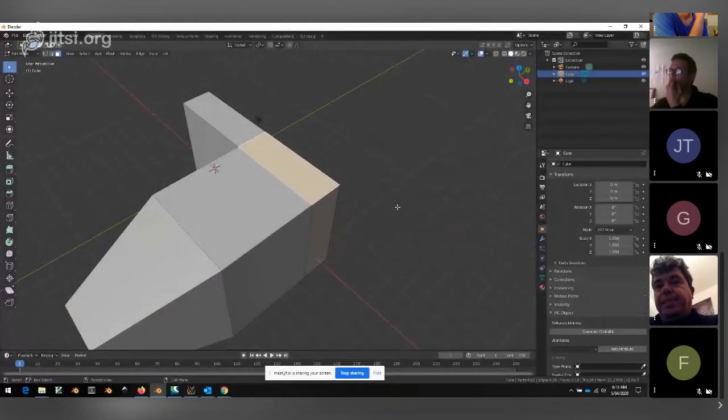As you can see, it's a kind of fluid modeling system, if you've never used this type of 3D modeling before. Most people in the construction industry are used to constructive modeling, where you model solids and Boolean them together. And from what I hear, the modeling tools used by engineering packages are even more limited than that. So Revit, for example, comes with essentially five modeling tools: extrude, loft, revolve, and something like that. Whereas this one is the type of thing you would use in Hollywood or CG, so it comes with a significant amount of modeling tools and a significant amount of various shapes.

So here, which I'm just opening up, is the default Blender monkey, the mascot of Blender. You can see I'm not really clicking any buttons, it's all hotkey driven. That's one of the things Blender is very good at, it's a very, very fast modeling tool.

Now, historically, Blender had no BIM functions at all. This is a relatively new development, probably only started late last year. We were doing a project, and we were just mocking up geometry in 3D space, trying to resolve various construction junctions. We were modeling it pretty rapidly in Blender, and it was quite a detailed junction. We were doing some curtain panels, and we found that we were able to prototype the construction details really quickly.

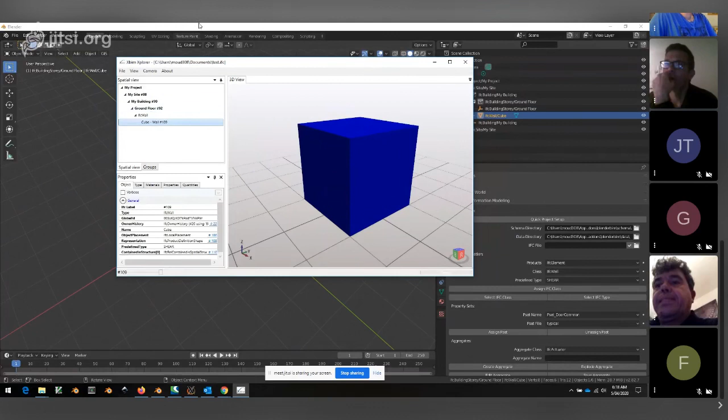And that's an example of the BIM functions available in Blender. As you can see, the geometry is decoupled from the classification, and this is quite important because many modeling programs don't currently let you do that. So the implications of that is that I can model quite freely, and I'll just turn on some snaps here so that I can model quite a bit faster.

So this is a 200 mil thick slab, and we'll just arbitrarily give it some dimensions. Some have seen this demo before, but I'll just do it again. So here I'm snapping a plane to that direction. I'm snapping that. I'm saying that's 90 mil in this direction, and that's 45 mil in that direction, and let's say it goes up an arbitrary amount, it doesn't matter.

There are various array tools I can use. So for example, if this were a stud, I can array this exactly along a particular axis, let's say the y-axis, every 450, which is pretty typical for a series of studs, the spacing.

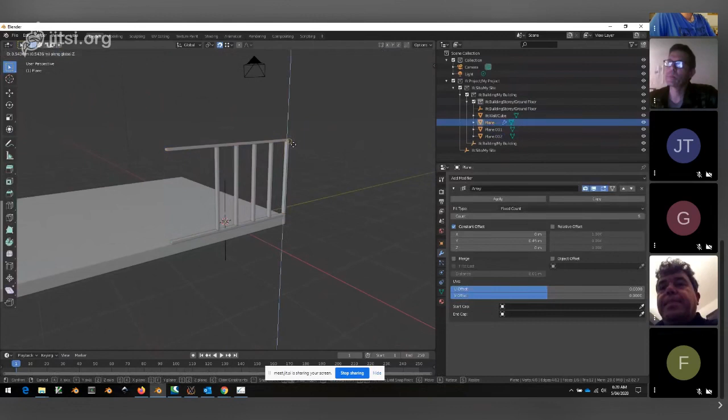I can then go and grab this guy and rotate him, rotate him here and snap him there. And let's create a bottom plate, and we'll take that bottom plate, set him as a separate object, clear that array. And now we have a bottom plate. That bottom plate is intersecting, so we'll just move that up a little bit, move that up here, maybe snap that to the top. And you can see we're getting a piece of a wall here.

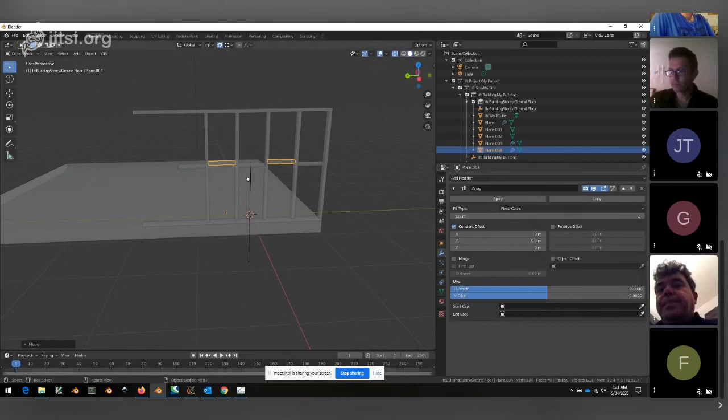Now we'll want to put some noggins in there. So I can snap this here, maybe just arbitrarily move that down here and move that back like that. As you can see, noggins are usually staggered so that you can get the nails in. So we can do that to the noggins and move the second bunch over here and move that so that it's staggered. And so you can see it's quite rapid to be modeling things in Blender.

There's not much - I don't need to go and jump in and out of views and draw profiles and that style of modeling. And I don't actually need to think about what I'm modeling while I'm modeling it. I just draw. And this is quite natural if you come from an architectural background. Maybe a little bit less natural if you come from a services background.

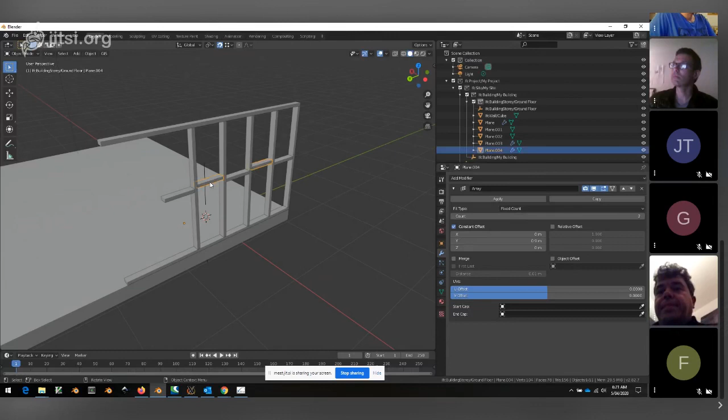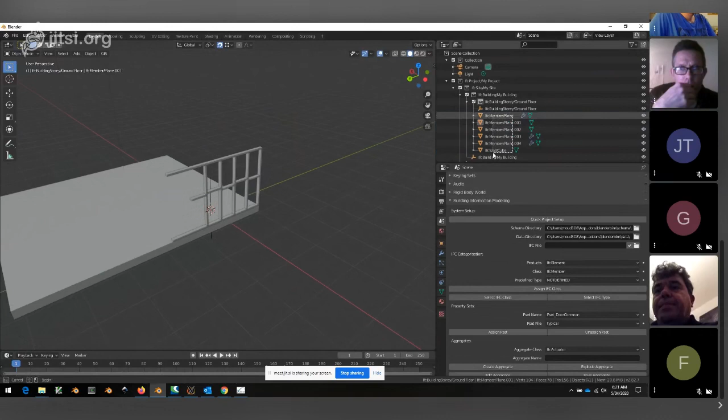And later on, once I've finished working a few things out, I can just go and select a whole bunch of things and say, you are all member elements. And if I find member somewhere here, I won't define it now, and assign, and now everything is classified. So I can select all these objects, hit export, export my IFC file, and there we go, we have our building.

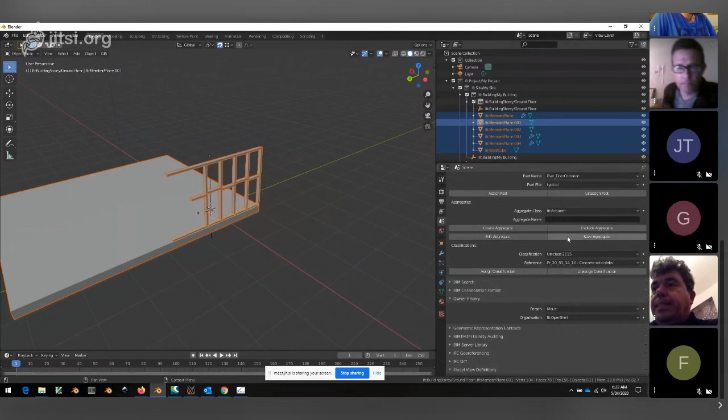Now there's a whole bunch of other features here. I might go through a few of them today. There are property sets you can assign to things, and it understands aggregates and classifications. So maybe what I'll do is I'll open up a file and we can see that.

So if I start a blank file here, what I'm going to do is turn on this experimental CPU multiprocessing feature. That allows me to import files using all of my processors, so it's a bit faster. I've got a bunch of IFC test files here. I'll start with this sample project.

It's 61 megabytes, so I'm going to start the stopwatch here, because this has been one of the biggest issues I found with IFC imports and exports - that they're really slow. So I've just started the stopwatch, and it's chugging away.

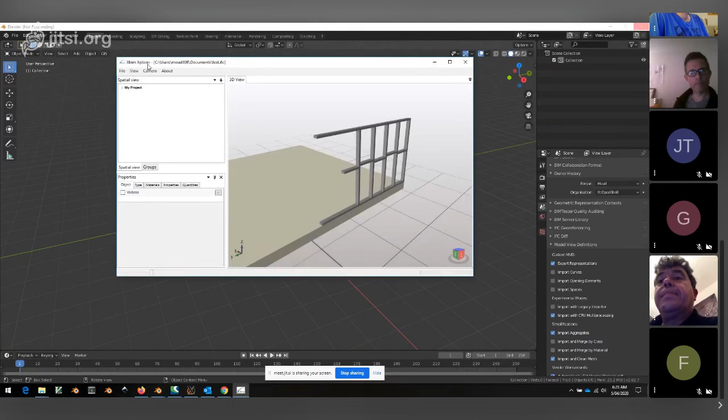Usually when you get to IFC files nearing 100 meg and then exceeding 100 meg, it just becomes a bit of a pain to use them in packages which can author. It's okay to view them in tools like XBIM, because all they do is just view the file. But in an authoring package, it needs to convert the file into something you can edit as well.

So while that's loading, for those who haven't seen, this is the BlenderBIM site. There are new features added nearly every single day. So if I click on View All Changes, you can see the work that's been happening.

So just for example, two days ago, support for different aspect ratios for BCF. I'll give you a little demo of BCF later on today. We also allow the ability to diff IFC files together.

BlenderBIM is part of the IFC Open Shell package, and this comes with a whole series of little utilities which you can find in this code repository. I can send the link out if you're interested.

And the utilities, even though BlenderBIM is built with Blender, many of the utilities are built as separate programs. That way you can plug them into each other. So it can also be plugged into FreeCAD, for example. You can plug it into BIM server, or if you're rolling your own, you can also plug it into that.

So there are tools, for example, to convert IFC data into a COBie spreadsheet, to convert IFC into OBJ and DAE file formats, to extract IFC data out into a CSV - we'll just see if it's still importing - and to look for differences between IFC files. So if you've used Git before, you know it can check the difference between two files. Here you can do that as well, and I'll show you a quick demo of that.

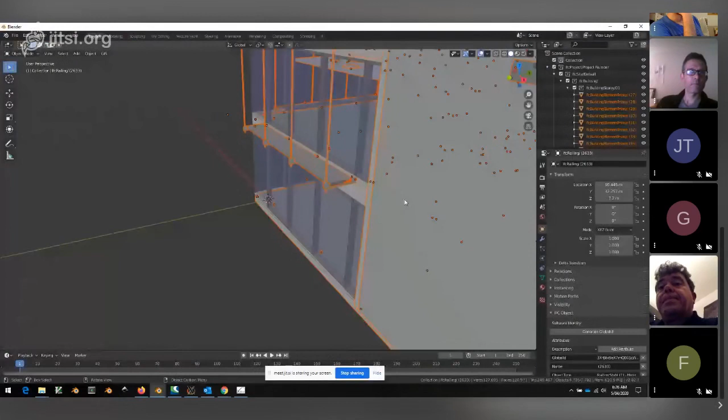This is something that's quite important, because we often have to work with quite large IFC files - we're talking gigabytes of IFC data. So getting the import times down is very, very important. So far, I think 3 minutes for this level of detail of a model is not too bad.

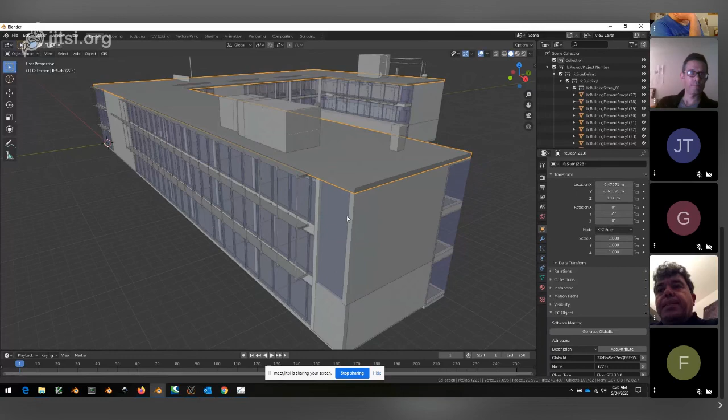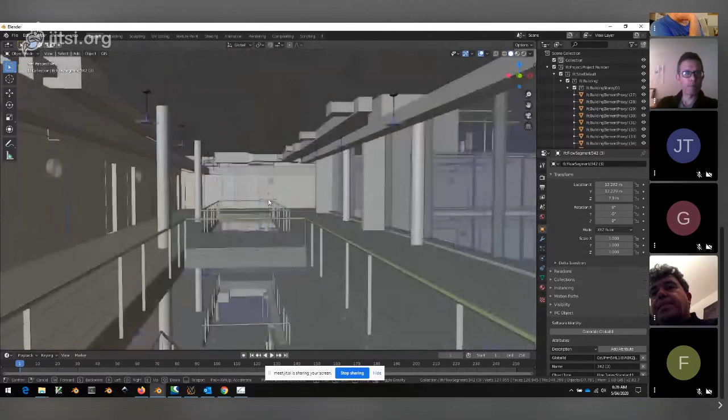And you can see there's no lag whatsoever. Probably on the video streaming there's a bit of lag, but on my screen everything's really fast. You can see this is a multidisciplinary model - there's a mech in here, there's a bit of, I'm not sure what that is, probably fire, and so on. You can see it's relatively detailed, and there's no lag as I just go around the screen.

How do you fly with a camera like this? Let's say one of the problems I had was to navigate in the model.

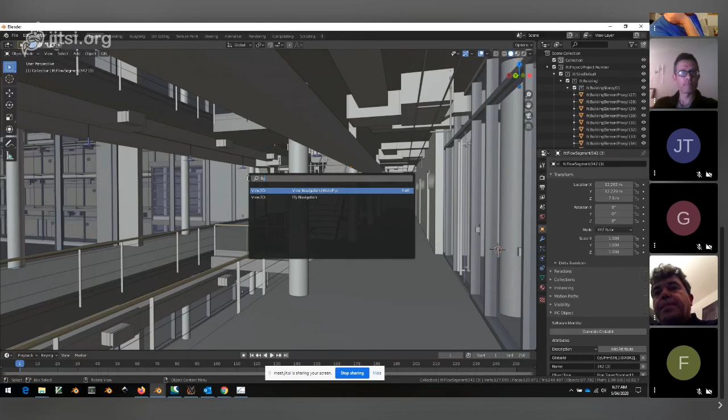Yeah, so that's something called fly mode in Blender. If you press F3, that will bring up everything that's possible in Blender. So if you type in fly, you can see there's a view navigation, walk fly, and the shortcut is shift backtick, which is just something you have to memorize.

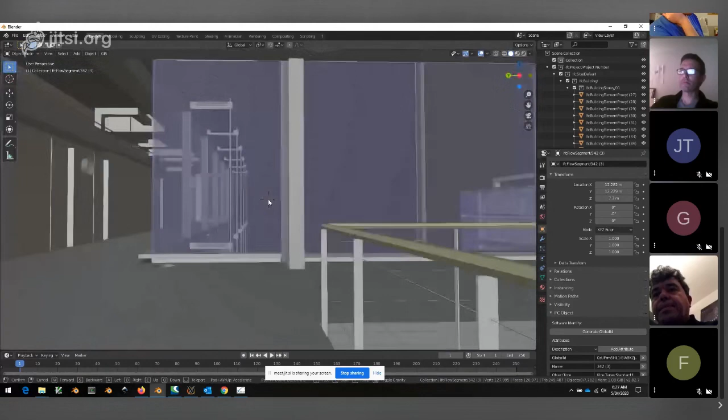So if I press it, it basically turns it into a first-person shooter game, and I can move around and fly and so on, and go up and down. It's really, really smooth, especially when investigating things. And I can hold shift to go faster, and I can use the scroll wheel as well to change my speed.

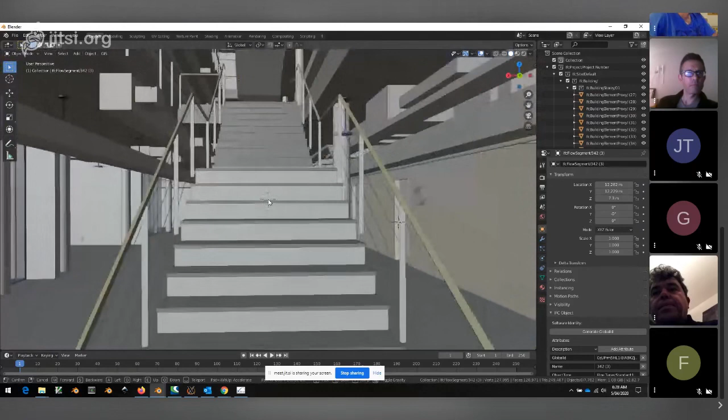So I can go really slow if I want to work on this particular junction. It also allows walk mode. Here I turned on gravity, and I can jump through this void and fall down to the bottom floor and walk upstairs and so on. Wow, it's a really great way to navigate your model and spot ridiculous things like this balustrade junction.

Just a side note, if you don't have an American keyboard, you can change keys in options. So that is here, key map. And I think if you just search fly, you can click here and change it to whatever you need it to be.

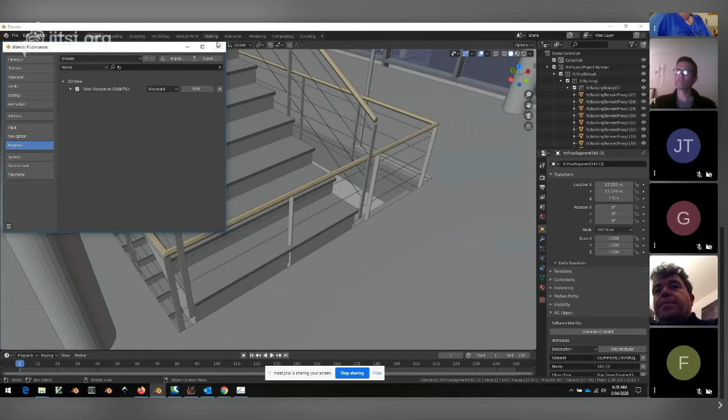Where was I? Yeah, so if I turn on a few more shadows, we'll add a bit of cavity as well. This just makes things nicer. You can see a bit of shading happening in the model, and you can see there's still no lag, but I will turn it off just for the demo.

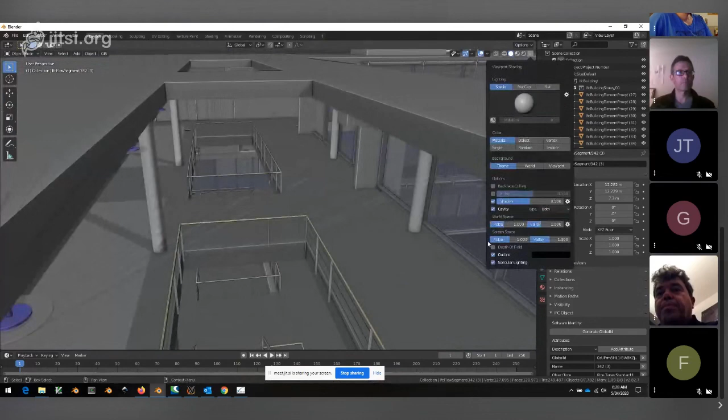One of the things you can do is select by a certain type of class in IFC. So for example, if I wanted to select all slab objects, I can just hit select, and now I have them all selected, and I can go and hide them and so on and see all the guts of the model.

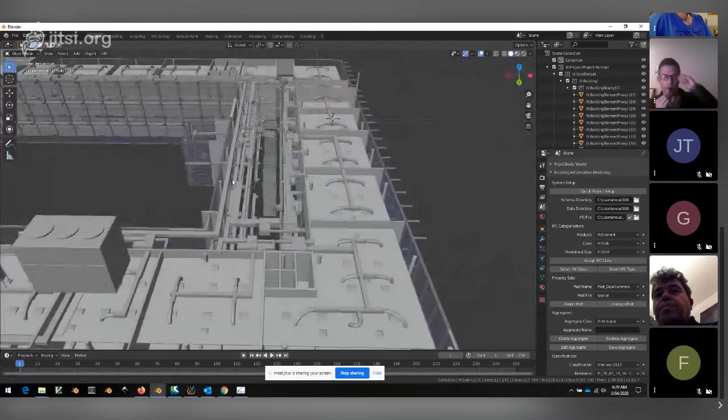There's also various types of search features. So if I click on an object in the object properties, you can see it's brought all of the object attributes, the name, object type. This one comes from Revit, so you can see the tag is the Revit element ID and a whole bunch of property sets. It has pset slab common, dimensions, constraints, a whole bunch of property sets. It's also got some quantities, a gross area and a perimeter associated with it.

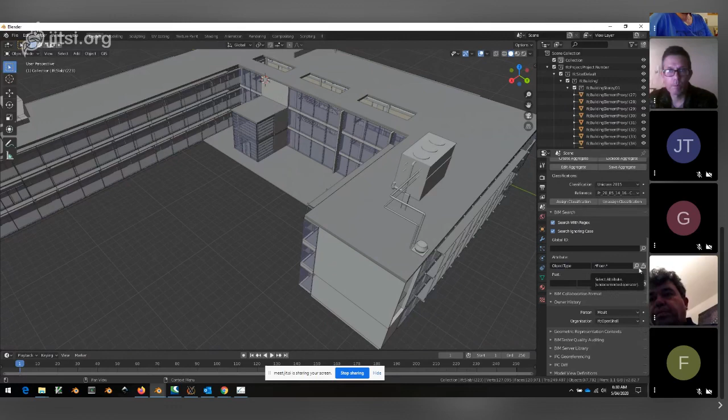So what I can do is search on these things. Let's say I want to search for all object types that contain the word floor. I can do that as well. There's a search feature with a lot of options here, but I'll just go through a few. I can search for a particular attribute of object type, and this time I want to use wildcards. The BIM search supports regex, so you can do some very powerful searching, and you can see it's come up with all these results.

What I can additionally do is color the model. I've just pressed that button, and if I change it into object color mode, you can see it has now colored the model based on its object type attribute. If it has a different color, it has a different object type. This is very useful when auditing a model. You can do things like coloring based off a fire rating property, and immediately spot things which are not fire rated that should be, or whatever.

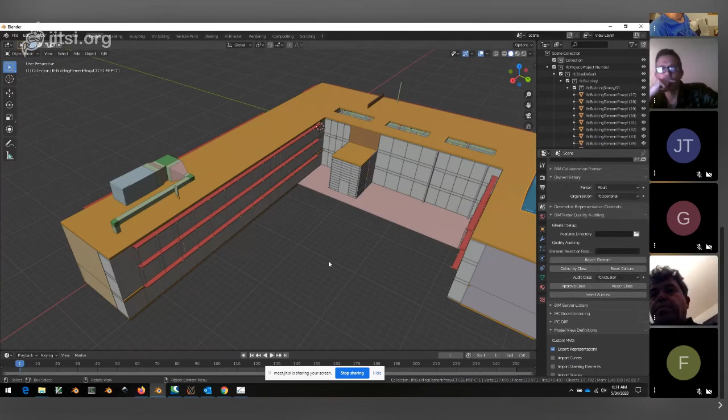Another really useful tool is to color things based off their IFC class. If I select everything in the model and hit color by class, you can see the colors have changed again. I noticed this wall is different from this wall, and that's because this one is a regular IFC wall, and this is the IFC wall standard case.

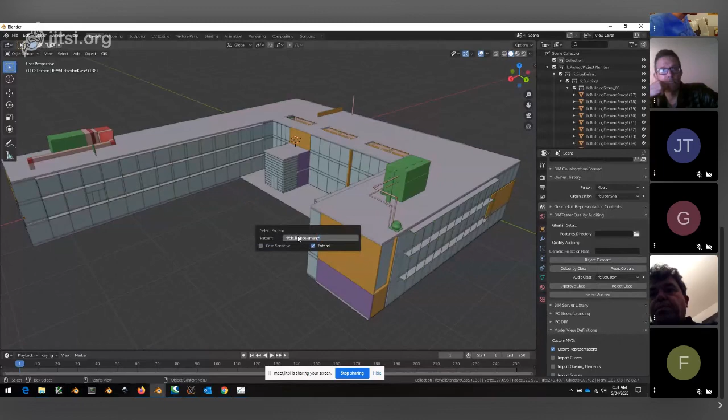I can also use pattern select tools, so I can search for building element proxy. As you can see, everything I've selected right now, if I isolate, everything in green is a building element proxy object, which means the BIM author has not properly classified this object. For example, I think these are probably structural members for the facade. They probably should be marked as an IFC member, for example, or especially these very important big boxes, this AHU and what's this? I'm not entirely sure what this particular object is.

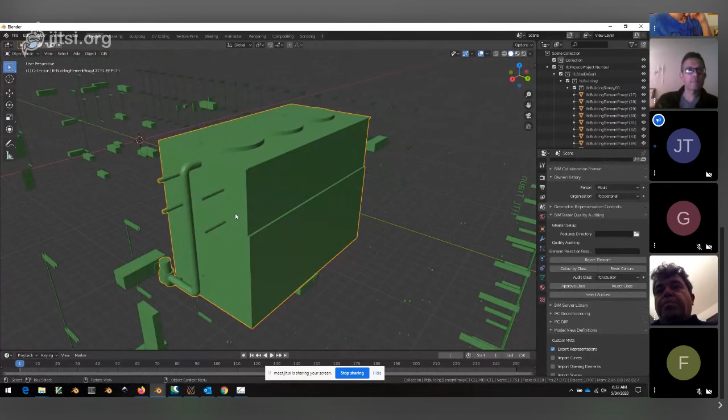But it's for cooling, yeah, some sort of cooling thing. It's probably pretty important to be maintained, for example. And because they haven't properly classified this object, that means if this model wants to be used for facility management purposes, well, it won't show up because they haven't properly put it into the right category. And so that's a problem.

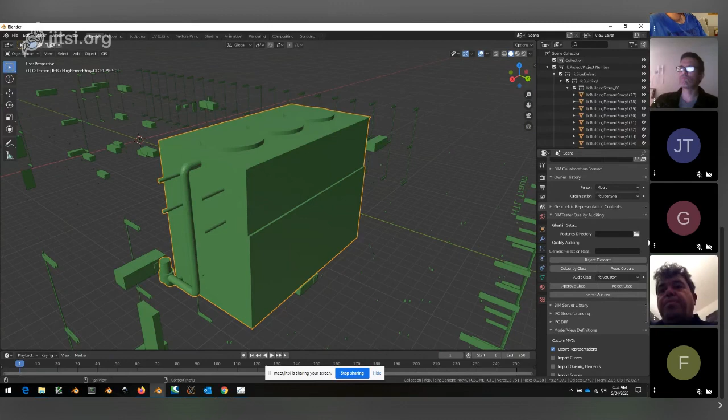If I just do a selection here, I'm just curious, so there's 700 unclassified objects, and that's 10% of the 7,000 that I see here. That's pretty poor, but that's also the kind of state of the industry today, and that's a bit unfortunate. You can also see all the names of the objects are a bit nonsensical, just numbers, with the exception of a few, probably coming from the MEP trades. They tend to do a better job, I find, in naming things, and the doors.

Actually, now that I take a closer look, maybe the names do make a bit more sense. Maybe they've chosen to name only certain things and keep the rest as numbers.

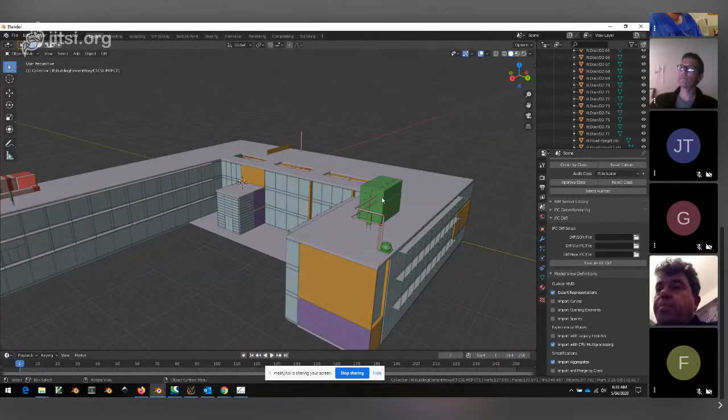Anyway, so that gives you an idea of some of the things possible. The color palette is something predefined, let's say. Yeah, currently it's hard-coded. The issue is when you get too many colors, it just becomes hard to see. So what I've done is have it cycle through a preset list of maybe 7 or 8 colors.

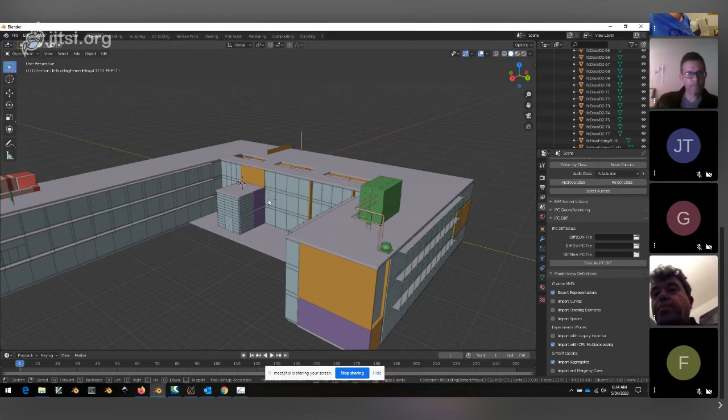Sometimes that's a problem because you have attributes with more than 8 types. But just from using it day in, day out, it seems to do the job. Good, simply because I can tell if something is a color I don't expect. For example, I expect all ducts to be light green, light pink, and all junctions and flow fitting elements to be this red color. And I can instantly spot if something isn't, or if something is green, and that's the most important thing if I'm checking for classifications.

So hope that made a bit of sense. Yes, no, it looks good. The colors look good to me, at least. Oops, fantastic bathroom. Okay.

I might also go through a couple of other features. BCF is a recent addition. BCF is another standard by Building Smart. They give the ability to mark issues in a model. So in software engineering, we all deal with issue trackers and bug trackers, but it's not really standardized. You can't really move from one bug tracker to another. That's usually not a problem in software because it's just a bug. But in AEC it's probably more important because it has legal implications, so being able to keep track of all the issues within a BIM model is pretty important.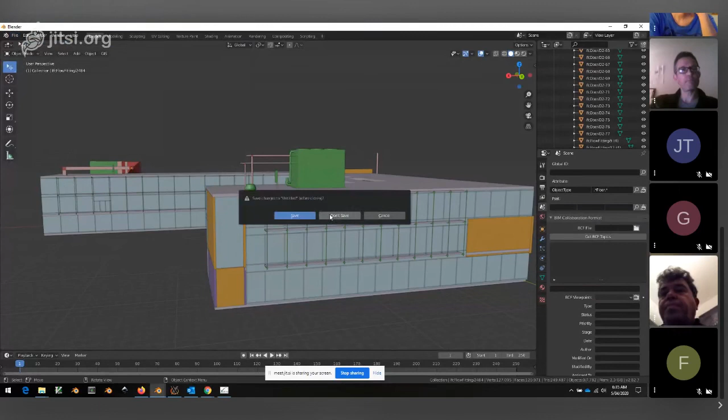So if I start a brand new file here, and here we are, I can load up a BCF file. Currently I only have read abilities on a BCF file. So let's just see here. I have a projects folder. I'm just realizing I can't click on that because it might show some super top secret work projects and all that type of stuff.

I'm just going to type it out here. Here we are, test cases, 0.1 markup. All right, so what I've just loaded in here is a BCF issue. And what I will also do is load in the IFC file associated with that BCF. It's a small file, so it should come in relatively quick. There it is, so this is just a test model with some piles into the ground.

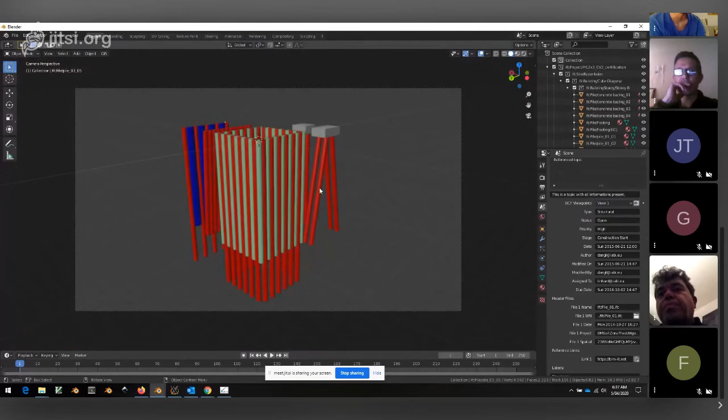And if I click on that, you can see these are two topics. So the lingo is topic for bug or issue. You can see it's got priorities, stages, authors, and all that type of stuff. There's various viewpoints associated with the topic, so I can click on a viewpoint and you can see it's displaying it there. At the same time, the snapshot's overlaid on top, so if I move the model, you can see what was there is also shown.

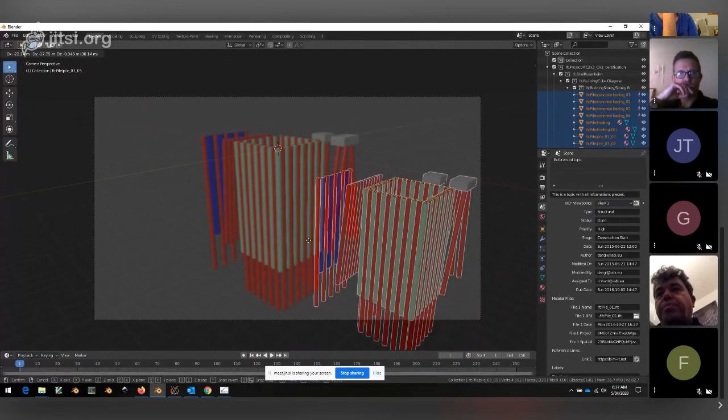This is pretty good. For example, if you are importing from other programs like Revizto, which is another bug tracking one, you can go and overlay their snapshots and compare what they're pointing out versus what you're pointing out. You can change the views and all that type of stuff. It also supports associated files and labels. So for example, a reference link - I can click that and it will launch up this link. Other files as well, I can open up whatever associated file or link. So if I open up this XSD, it will open up in Internet Explorer. Okay, and there we go. So that's a bit of information about BCF.

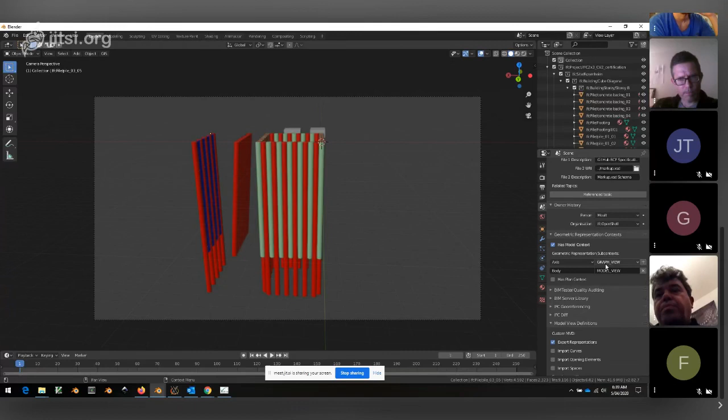I might show - I won't go into detail about geometric representation context, but for those who know what this is, Blender does support it. It's one of, I would say, the only BIM programs which support this. The idea is that an IFC model can store more than just the body representation of a model. It can also store things like its plan view, or section views, or annotative symbols, or things like that. So it is possible to store entire floor plans in a BIM model, and it's just a limitation of the vendor if it's not made visible.

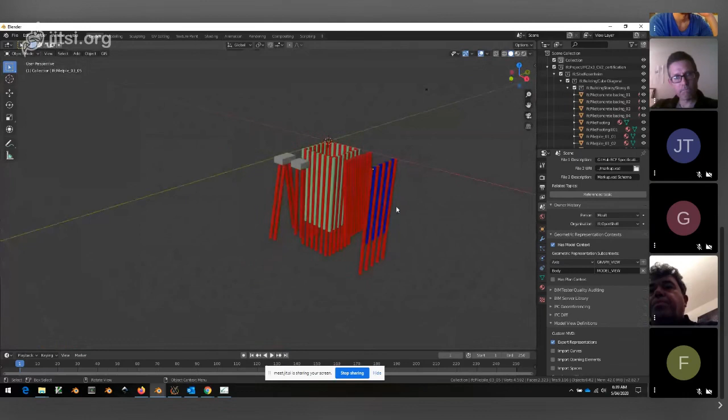So you can see here there's various types of views and various types of geometric contexts. For example, the clearance one you might use for defining service zones around mechanical equipment, so you can say that this area must remain clear for maintenance or airflow purposes. Then you have center of gravity, which is important if you're planning out lifts and construction sequencing. That might give you a bit of an idea.

I might do a quick demo now on a couple more features, and then maybe we'll do some questions or something like that.

There's the ability to check the difference between some IFC files. So let's say I have a couple of objects, and I have 3 objects here, and I just export that out to an IFC file, and I call that foo.

Oops, sorry, that was an error message. Oh yes, that's a bug I should fix. If I just open up a new session, it won't refresh what's available. So if I just change that, now you can see that will work. That's probably something I should fix.

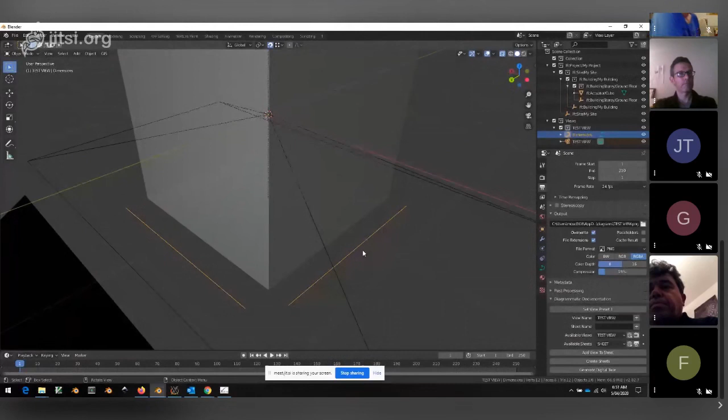Yep, and which I think is great. Unfortunately none of the current BIM programs are at a point to accept any of that, but I do like the possibility of translating this annotation with something like FreeCAD, and you could actually round trip construction documents right between the two programs, which I think would be really cool.

Yeah, I think that would be very cool. I'll show you a few interesting features of this. So let me just switch the direction of this curve, and that will fix this upside down 2000. As you can see, it is an art to do your documentation well. So now you can see that 2000 is the right way up.

Now the way the cutting works here is that IFC stores geometry in a huge amount of ways, so to efficiently cut through that is actually really difficult to do a Boolean cut. And that's what a section is, it's effectively a Boolean cut. So my current approach is for everything that's cut, you do a proper section, and for everything that isn't, you just do a rendered view. It becomes rasterized.

I currently think that's not too bad of an approach, considering that if you really do want to measure stuff in the background, that's what the 3D model is there for.

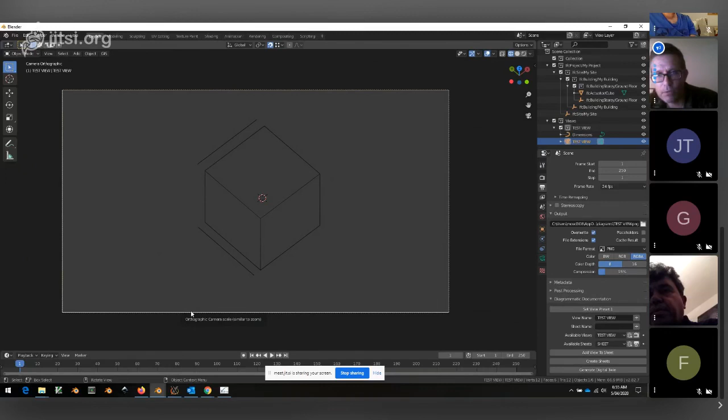Sorry, Dion, is it possible to ask some questions? Can you just explain a little bit more what you're actually doing now? You're talking about making some cuts on the model, right? Yeah, you're cutting the model, right?

So are you cutting it with Blender or with IFC OpenShell? So in this view, this AXO view, nothing is being cut. And in the first view, also nothing was being cut. So the way something gets cut is, if I go back to plan view, now the camera is actually cutting through the object, and I can set clipping planes and so on, but we'll just go for a simple cut.

It's an OpenGL cut, you mean? No, it uses IFC OpenShell. It uses a combination of IFC OpenShell for the semantics, and it uses OpenCascade to actually cut. So you are generating a section with IFC OpenShell, you're making a section of the model, right, for the plan, right? Yeah, I'll show you that now.

Okay, so if I export that, and this time I'll export it to a particular folder, and I'll call that test.ifc. And what have I done here? Have I done the same mistake?

Yeah, I'm asking you because I also personally made some tests with IFC OpenShell to build plans and sections. Yeah, that's cool. There's a real possibility to make plans and sections with the stack. That's cool.

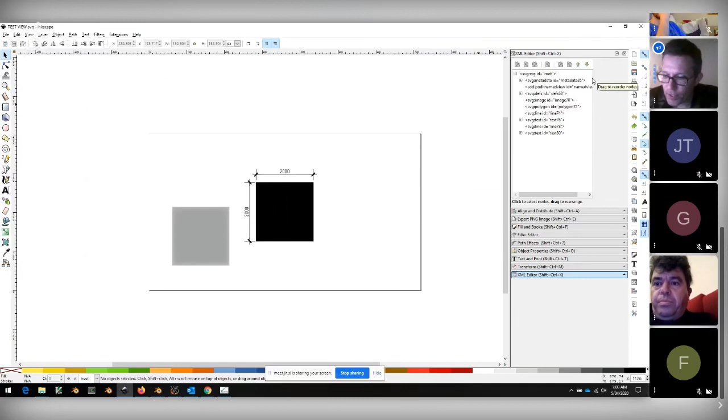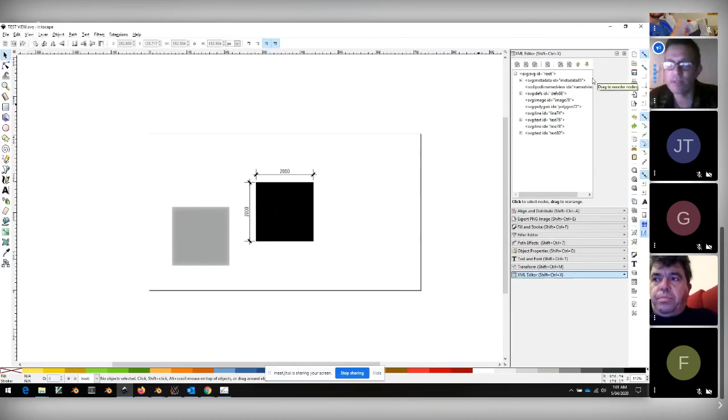So next step, I've done experiments with basically the same idea with IFC OpenShell, plus tests with generating symbols for doors and windows, also with SVG. It's working pretty well. After that, you can assign to each object some kind of 2D symbols, which are functions that generate SVG symbols, and then you can have some Revit-style plans.

That's cool, absolutely, yeah. To do symbols correctly, the proper way would be to have a particular footprint representation, a footprint representation in plan view, for example. Then you would store, let's say, the door swing within that. I think that's correct, I have to double check. Unfortunately very few programs do this. I think Revit actually does, so that's a good sign.

So assume it isn't just about associating the annotation to the object. It would be really cool if that could also be stored back to the IFC file and then read out, and so on. That would be cool to do.

So you envision ultimately that both SVG and IFC will really be an integral part of recording that annotation. Correct, I think IFC stores the association in the model, the annotative potential, as it were. But at the end of the day, you still need documentation. You need these sort of maps of the world to tell you what to look at, to pay attention to, which dimensions to follow. That can be recorded in SVG form by coming up with a standard of classes, mainly classes I would say, so that you can query it.

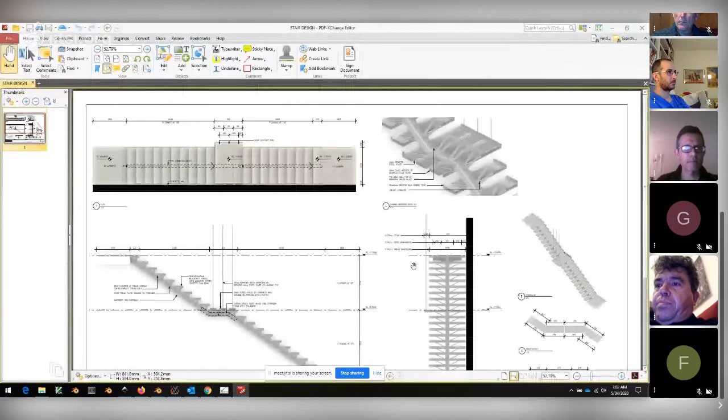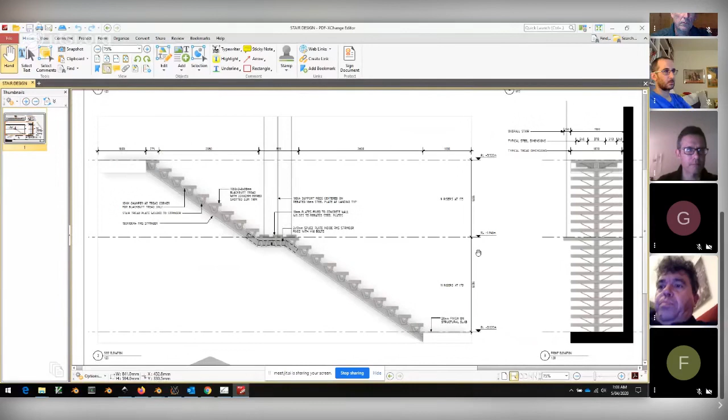This is an example, a really small project that was done - some of you may have seen this before. It's changed a bit. This is a pet project a coworker and I are working on, a set of stairs. As you can see, there are different types, labels, arrows, stair arrows, RL tags, section and level tags, and a variety of views here - 3Ds, unfolded nets, and axonometrics.

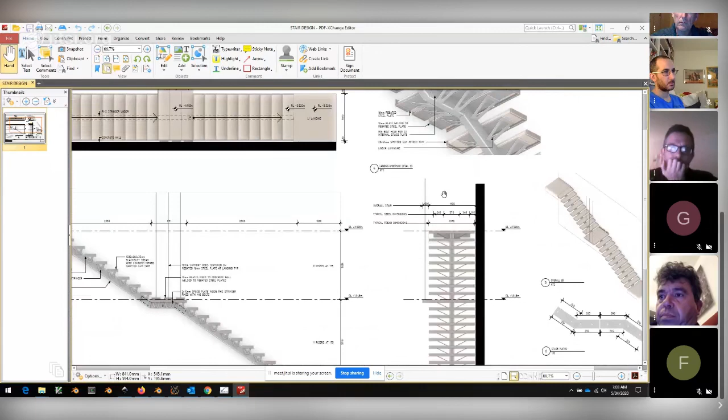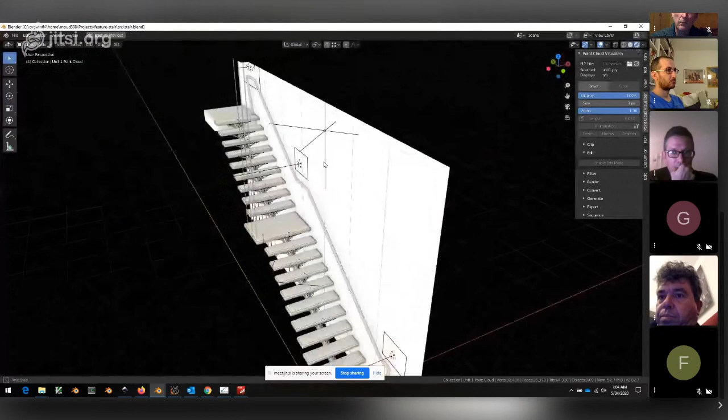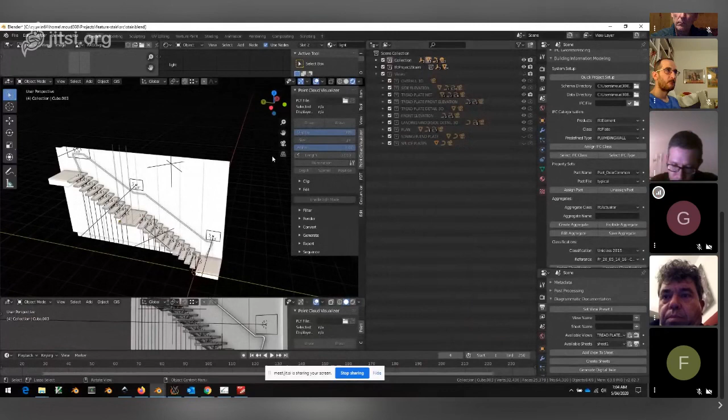This is the model it came from. You can see it's a pretty simple stair. If I turn on a rendered view, you can see it's pretty basic, and all of the members are properly classified into IFC objects. I have some experimental objects here I haven't yet decided whether they'll make it into the final design - if they do, I'll properly classify them into BIM objects. I also have a set of views, which might give an idea. I might also turn this one on.

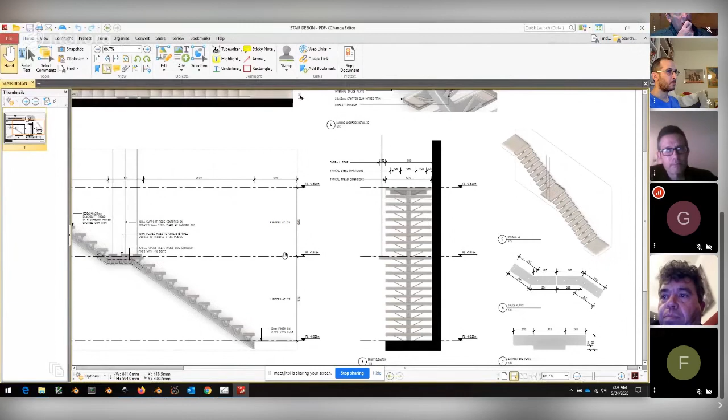This is a fun little project - we brought a laser scanner onto the site because this is going to be built into an existing void area. We scanned it and took the point clouds into Blender. So here you can see it with the point clouds, and you can see there's no lag whatsoever.

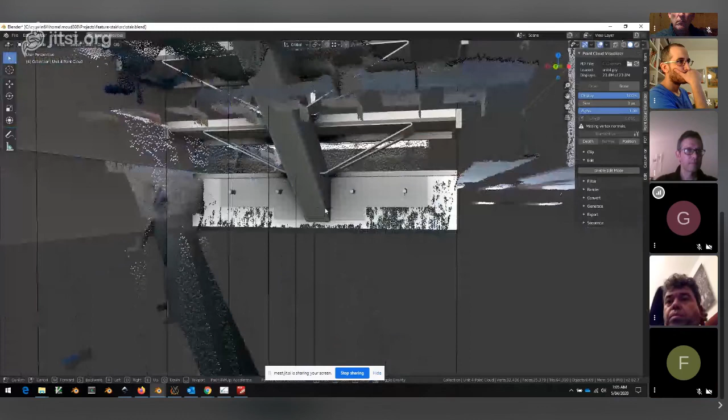Maybe if I make it a little more basic - again, you can see how the point cloud, this one's a bit rough, was used to check whether it fits. There are 4 voids here. In this particular void, if I move into a section view along here, you can see there's a discrepancy of about 30 mil. That's just what you get with concrete, I guess.

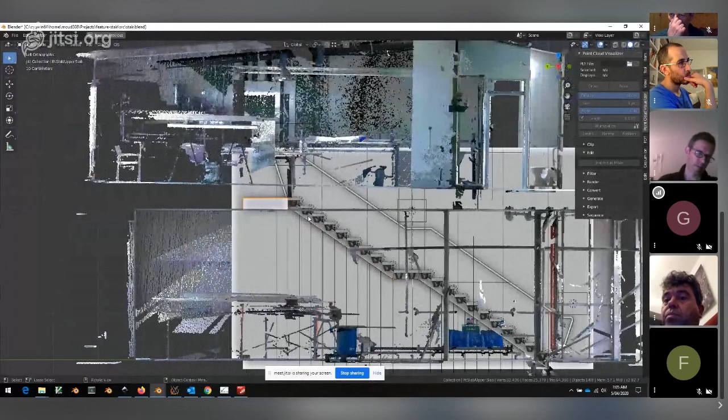This point cloud scan didn't turn out too well. There are 4 scans total, this being 1 of 4, and they all have discrepancies in different areas - that's just because when you build things 4 times, they aren't exactly the same. You can also see that level 1 of this floor doesn't seem to be properly calibrated, so the floor appears to be sloping, which obviously isn't true - otherwise there'd be big problems.

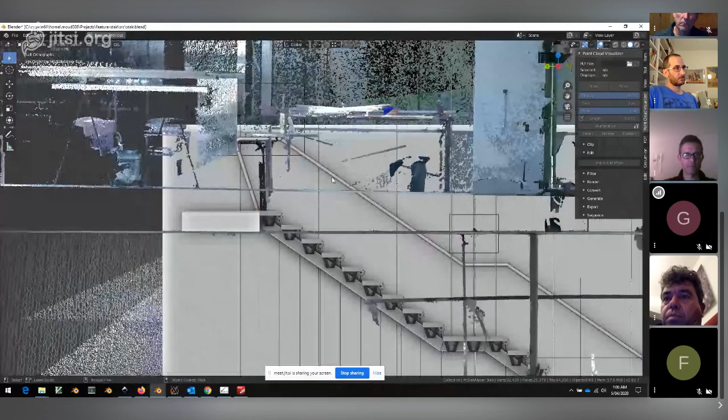It shows the potential of bringing a few different technologies together. This point cloud can be written into an IFC file - that's one of the features of BlenderBIM too. I wouldn't advise it unless you knew how to compress it at the moment, but it is possible.

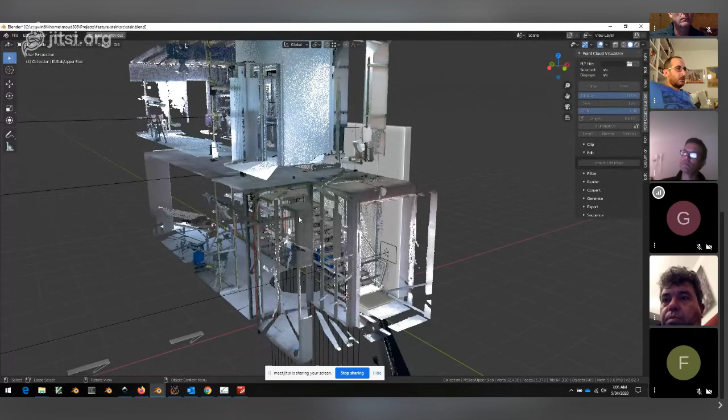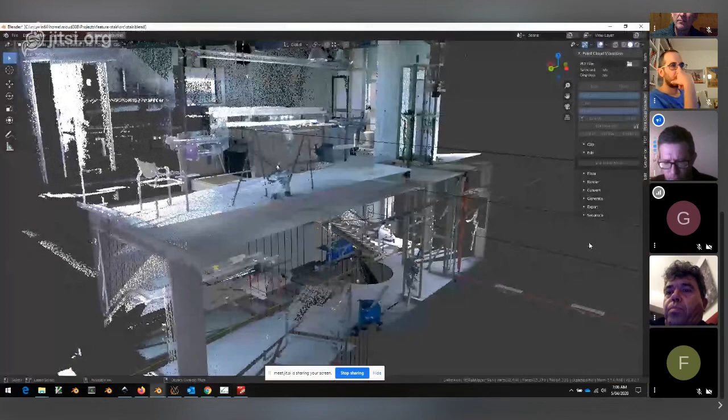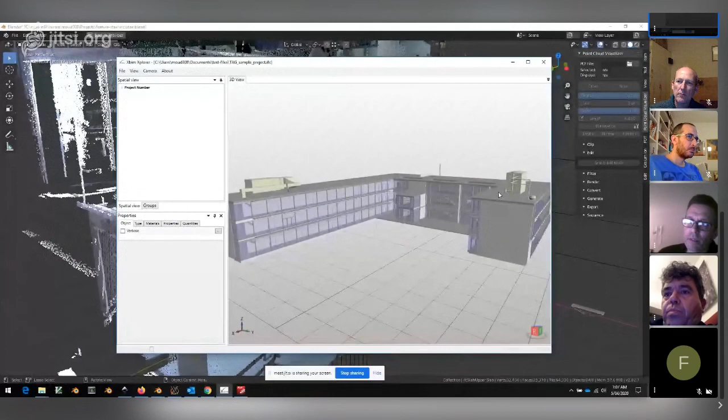I had a question - at some point you used Xbim Xplorer, right, to see the IFC file? Yeah, this one, I've checked this. It doesn't run on Linux, right? Correct, not now, but maybe soon because they are porting to .NET. The core .NET will be the only .NET in the future, so maybe it will come to Linux soon. I know, but it's what I see right now - it's on WPF components, which are a Windows GUI, so it's not running on Linux right now, but they're in the next .NET. Maybe, let's hope. Okay.

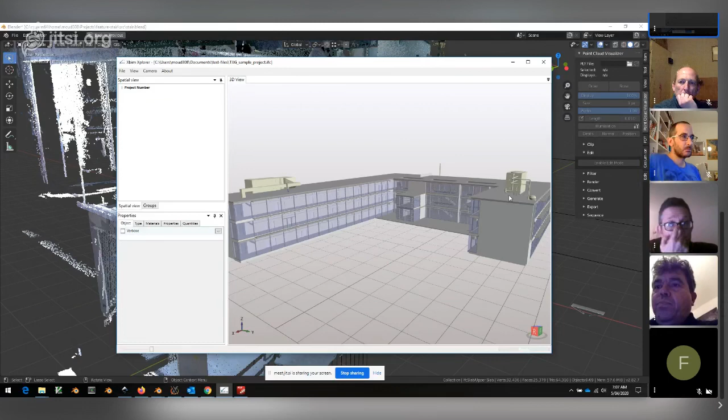One of the things I like a lot about XBIM - a few things actually. First, it lets you view all the IFC data without any interpretation, so it's really what truly is in the file, and it's quite easy to navigate through - I can click, click, click, click, and go back if I want. That's very good for debugging. It also has validation tools, and you can run interactive commands on it too.

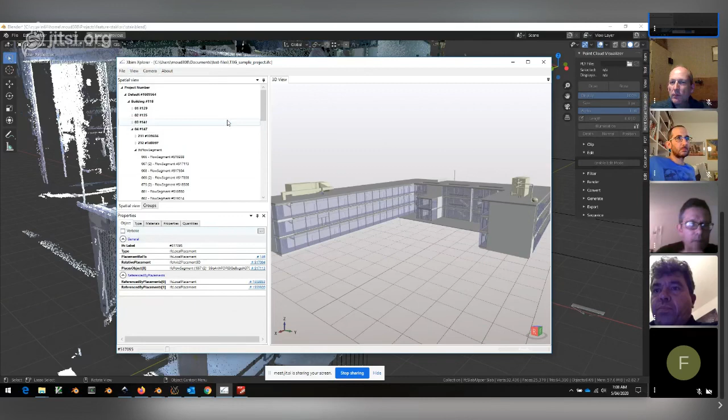You can also do that in Blender, but it's just a nice feature - an information log, so no information when loading the file. There's a validation tool, so I can click on validate model. That might take a while. It's a pretty good model.

XBIM is also one of the only packages which implements the IFC where rules. The IFC schema has a series - it basically describes what the schema can do in Express, but in addition it also describes constraints. For example, it might say for one object you're allowed to assign multiple properties, but you cannot use the same name in two properties - so you can't give it pset wall common twice. That's called a where rule. Most BIM programs do not implement this, and IFC OpenShell also does not implement this.

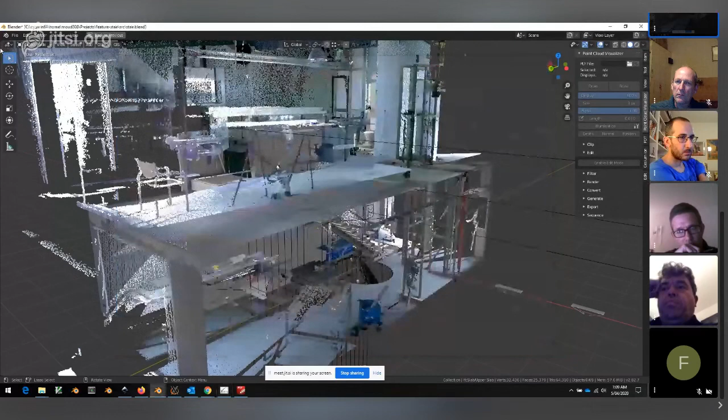As far as I'm aware, XBIM is the only one that does this, and it's very good for checking those types of potential errors in an IFC file. Although I have found that sometimes it gives a lot of false positives, so it's important to treat it with a grain of salt.

I will demo that Blender also has the console, which is really cool if you're just trying to learn IFC for the first time. You can just start typing in here with a fresh install, and you don't need to go through all the trouble of installing Python and all the 200 dependencies for Windows, Mac, or Linux. It's all just built into here.

Sorry, can people see this? I'll make it a bit larger. Sorry, I think that everything has frozen, at least on my side. I can hear you talking, but the last few minutes the video seems to be frozen. Yeah, I can see it though, Dion. Okay, you can try to reload your webpage. I'm kind of, because I'm recording, I don't want to. Yes, sure, no problem. Okay, just to let you know, nothing. You can continue, sorry. Well, sorry if somebody's watching the recording.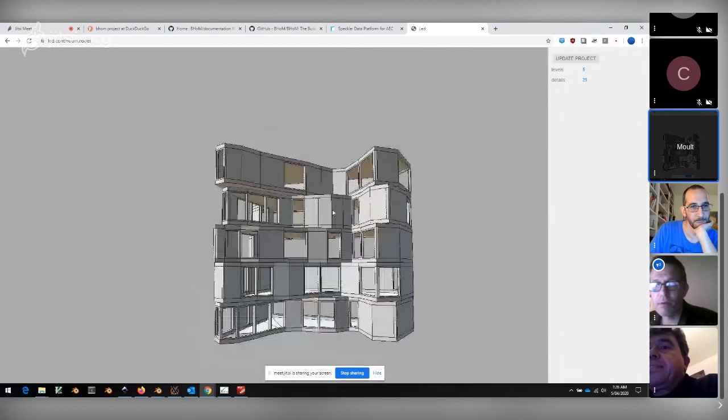This will be also very important for the future, and the future of open source, to have platforms, to have the web part of the stack go forward, and that's it. Very cool.

So, from my understanding, the domains of things like Speckle and BHoM overlap with the domains of IFC, in that they are a way to try and describe the built environment, which includes annotation, but also includes everything you see here, like windows and slabs and so on.

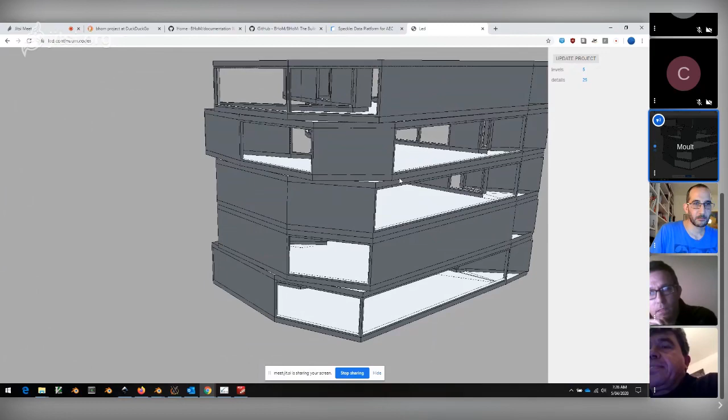And it's interesting - I think it will be very interesting to see how it progresses, because Speckle has, I think, the advantage of plugging into many programs and the exposure it gets from that. So, for example, there's Speckle Blender as well, which I'm talking to the main developer of, to try and work out how we can integrate that with BlenderBIM.

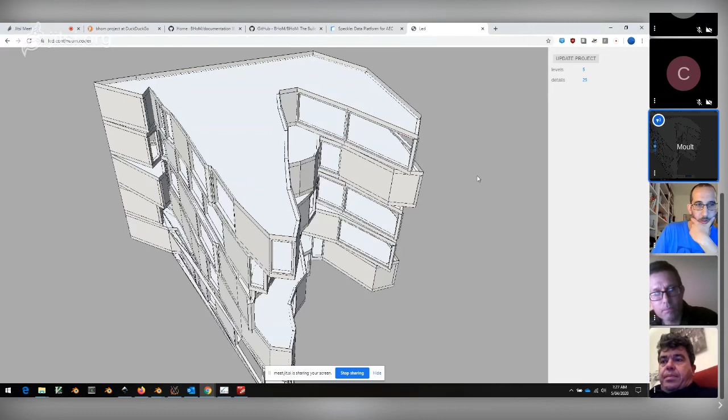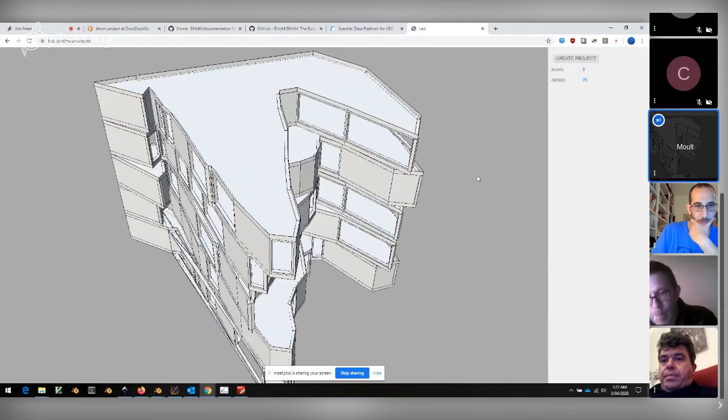But IFC, however, is starting to be mandated by more and more governments around the world, so that suggests that whether you like it or not, you still need to describe your model in IFC. No, that's for sure. So it'll be interesting to see how these multiple ways of describing the domain come together. I don't know what it will look like at the end, but it's cool, very cool stuff, and each one seems to be stronger in certain things than others.

Dion, I've asked if you're going sometime to the Blender meeting on Sunday, there's this chat room. I don't know exactly what your plans are, but at some point, if you want to go a bit deeper with this project, maybe you should go also with the Blender developer community to have it integrated in C++, in the Blender core, to have spatial windows, etc., because at some point Python maybe can be a bit slow.

Agreed, absolutely agree. So that's why I think we have to connect with the whole community, also in the broader sense, the hacker community around the world. There's so many people ready to help, I think. So yeah, should continue.

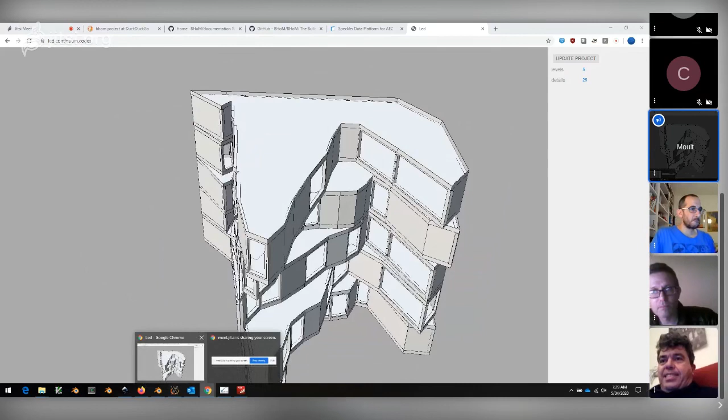Nope, okay, I hope you enjoyed a few of the things I showed. I'm sorry it was a bit here and there, it's starting to wake up on my Sunday morning. Which I think is fine, Dion. I think it was a great presentation. I think it's fine to have it be a little looser, because it gets people talking, especially when you're on this bleeding edge, it's just throwing ideas out there, kind of thing.

Yeah, many people asked what's the development plan for the BlenderBIM add-on, and I kind of just build things as I need them. So one day to the next it'll be very different, which you can probably see in the commit log. Just look at the past few days - you can see I do a bit on BCF, a bit of diffing, then I fixed a bunch of material stuff because the FreeCAD community was finding issues with it, and then a bit of stuff on clash detection, and then I did a stint on BCF because I was trying to implement things.

Oh, good news on the BCF stuff. I've been trying to propose that the BCF library, originally developed by podestplatz, as a Google Summer of Code project for FreeCAD, we turn into one of the reference implementations endorsed by buildingSMART. That will mean his implementation gets tested with all the test suites, so basically it's as certified as it gets. So that means every single open source project which uses it, currently FreeCAD and Blender, also gets top-notch BCF support.

So at any time, you can go into a Git repository, and I'll bring it up on my screen, and view any one of their projects. For example, if we click on the first one here, you can see the models and CAD files, and these Revit files, and anybody can open it and edit it.

I guess if you wanted to, you could submit a pull request, although maybe you should talk to Ryan before you do that. Feel free to fork it and develop it in your neck of the woods. Actually, I worked on this particular project with Lewis, who's on this call as well.

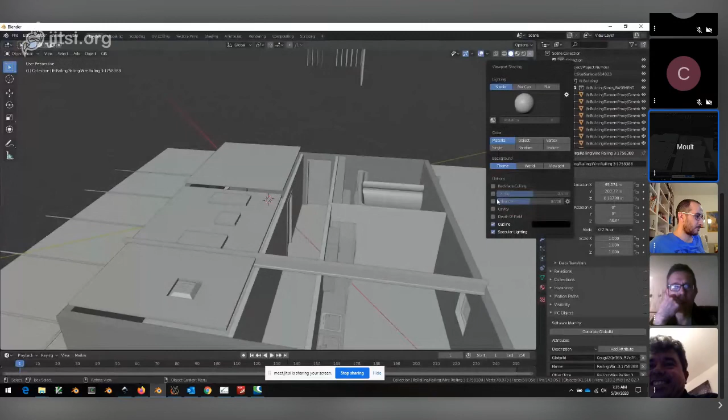He's the structural engineer on this project, and we actually use our issue tracker on GitHub to discuss the various structural issues on the project. We also use Riot, which is kind of a Slack, open source Slack version, like group chat. So almost the entire conversation of this project is out there basically.

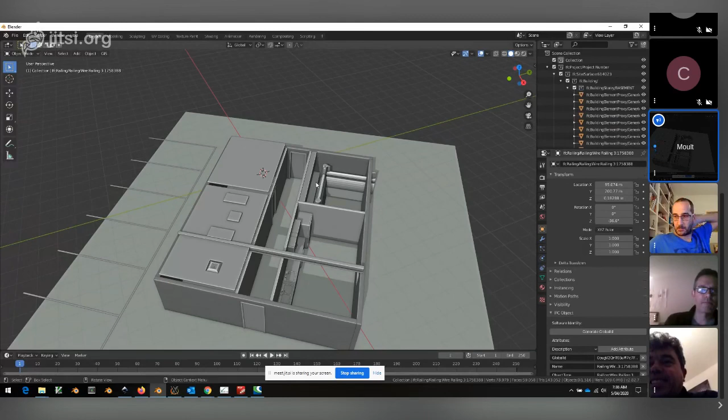So maybe just to cut it short, because we're going a bit over time, I'll just show this one of Ryan's projects, which I had lying around, so forgive me if this isn't the best project. I'll just quickly zoom around a bit in the model, and maybe next time, Ryan, for next month's session, you can give a small talk about opening design and the work that you do, so we can see in more detail.

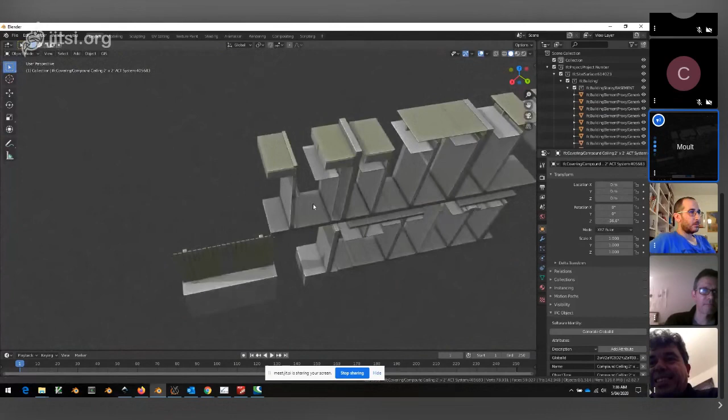So this is part of Ryan's project files, and I think the part we're looking at right now is not the actual project, we're looking at a bunch of test objects. As you can see here, what he's done is he's got a whole bunch, he should probably be talking about this, not me, so I'll just skim through. You can see a whole bunch of junction details, all done in 3D.

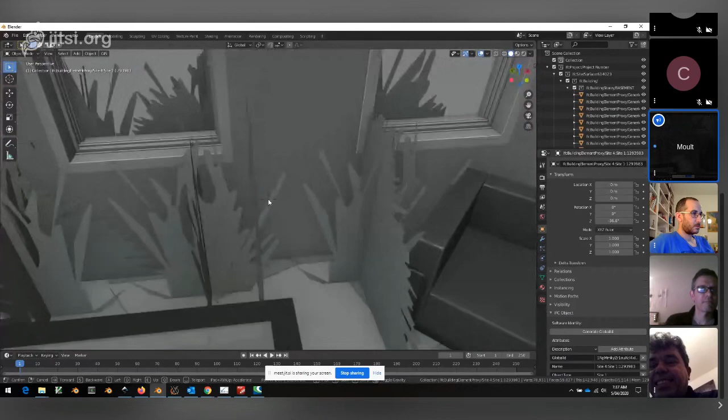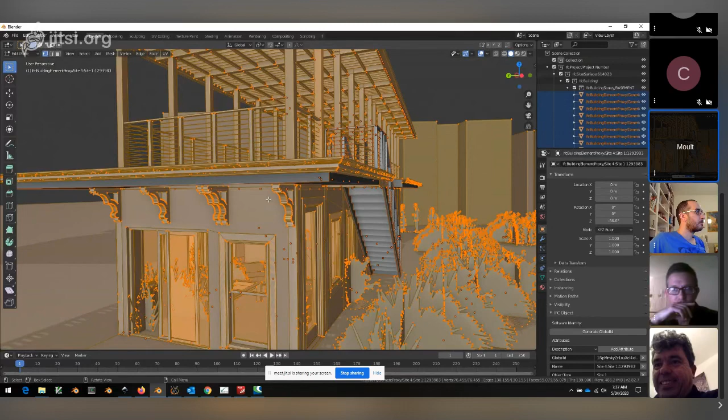No, I'm excited about what you're doing, Dion, along with Yorik. Obviously a lot of work on opening design is done with Revit, but we've had a number of side projects through opening detail where we try to simplify everything down to simple extrusions, and then we're able to round trip it between FreeCAD and Revit, so we can ultimately work on our own platforms and translate content that doesn't lose any data because it's such simple extrusion. Anyway, I could talk for a while, but yeah, I'm excited. I just want to convey that I'm excited about the potential.